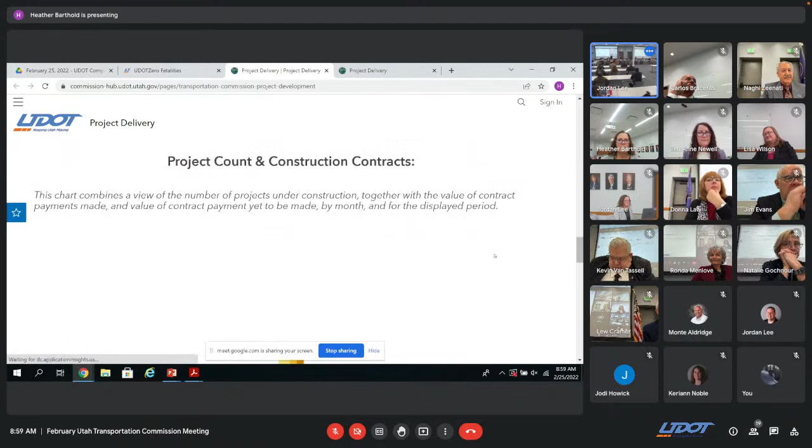Moving down into the construction side of things, we just have the numbers through December at this point, but it's pretty standard, especially if you look back at the previous month or previous year. We're really tracking 149 projects right now in construction, and we'll see these payments going up as the weather warms up and more construction will be occurring.

So here are the contractor payments that tie into the previous graph. Again, you can see the payments going out is just, we're in winter work right now. So you'll see these start to go back up again as more work occurs with the improvement on the weather.

And that is my update for you today. Oh, wait, I have one. Oh no, sorry.

So this is the contract award for the engineer's estimate. And really we're tracking well with our estimates at this point. They're in line with the bids that we're getting.

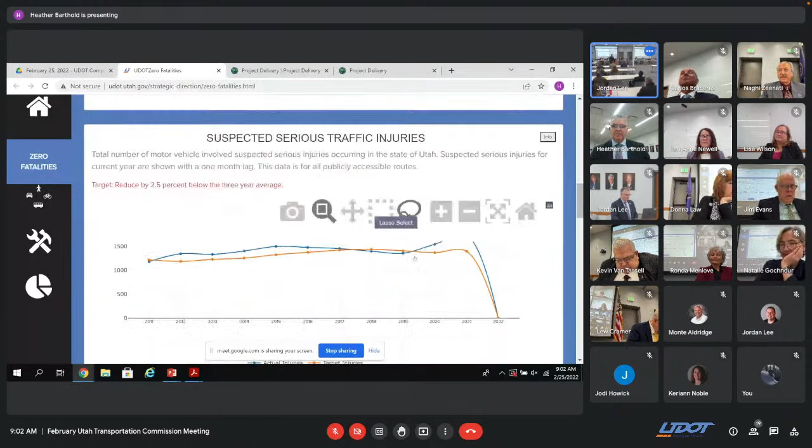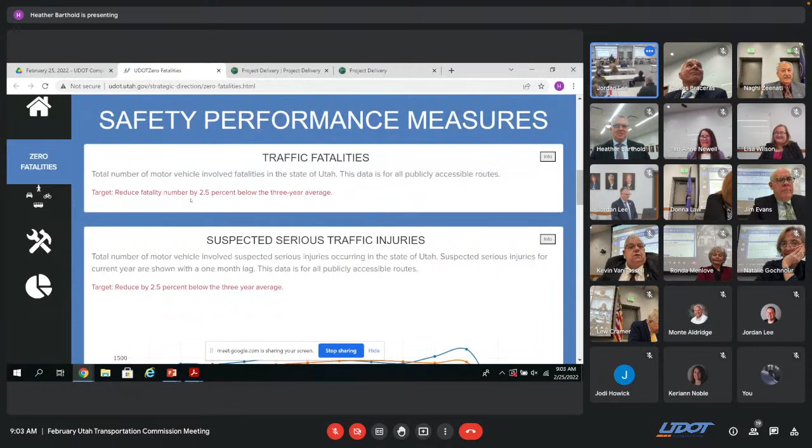As a reminder, we did have... what's this graph here too? For 2021, we had... This is gonna, the graph's not even here anymore. There we go. We don't still have it. There it is.

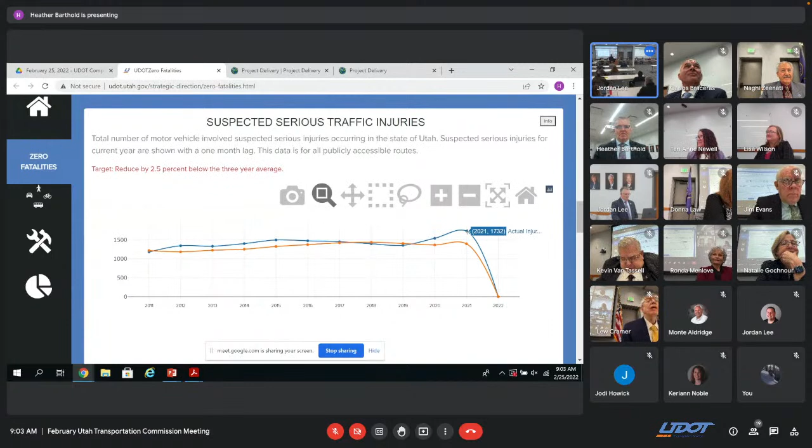329 fatalities in 2021, which is an increase of about 20. Actually, it was about 19% higher than the year before, when we had 276.

Currently, this year, we're at 38 fatalities for the year. 8 of those are in our vulnerable user category, which at this point, those are all pedestrian related fatalities, which is right now about 27% of our fatalities for the year. If you look at 2021, in our vulnerable user category, we had 90 fatalities, which was roughly 27%. So we're tracking right around that 25% of our fatalities each year are in our vulnerable user groups. When you say vulnerable users, that's pedestrians, bicyclists, and motorcyclists.

What a struggle this morning.

So that's kind of an update on where we are in terms of fatalities as it relates to this year or last year. But I wanted to take a little bit of time today to show some graphs on breakdowns of our fatalities statistics. Where is it?

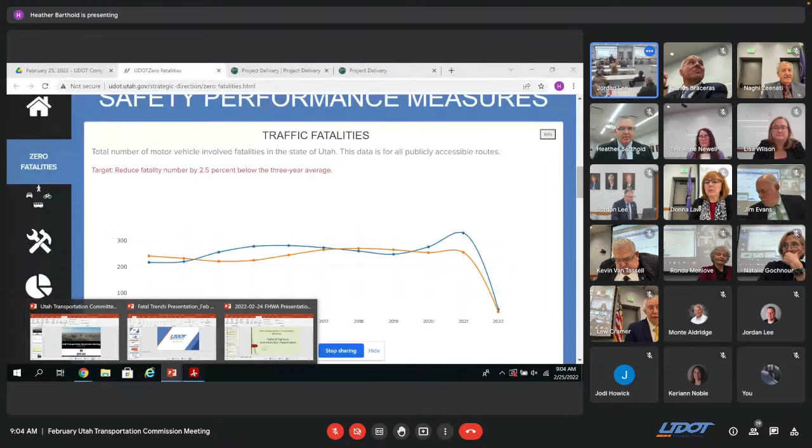Trying to run it. Where is it? There? No, that's about it. Oh, there it is.

Okay, this first graph here is showing our fatality rate, crash rate, and our VMT back to 1940. And you'll see over the last 80 years, we've seen a steady decrease in both our crash rate and our fatality rate.

And the other thing is this dark mass is our VMT. Let me move this thing out of the way so you can actually see. Just thought it was an interesting graph to see how our VMT has grown over the years and how our fatality and crash rates have dropped. Interesting graph. Just wanted to share that one today.

How have the new alcohol restrictions played into this? There's been some media about that, Utah's lower rate.

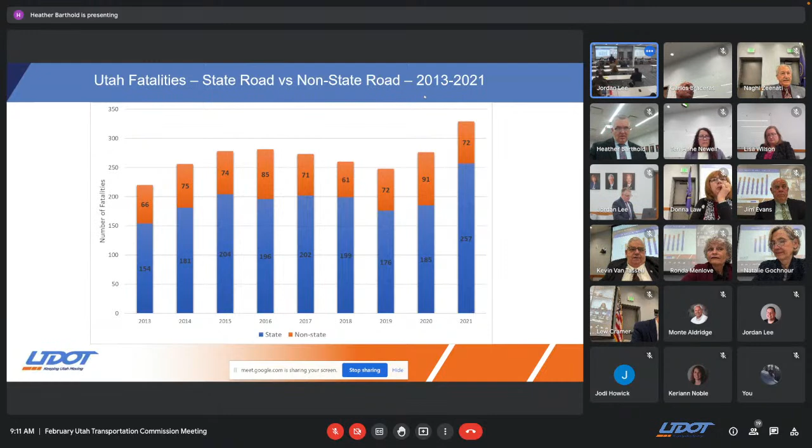Right, I have a question. Yes. Has anyone looked at the correlation with DUI and speed and how they're related? Are the DUI fatalities linked? Looked at those together? That's a great question, I don't have the answer to that one.

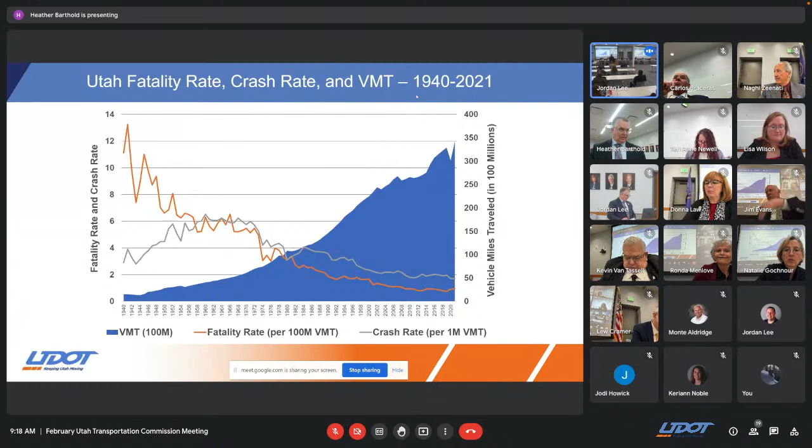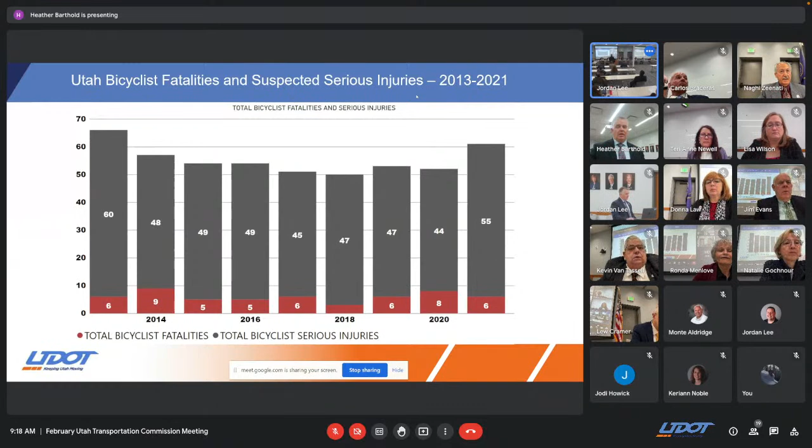Thank you. I just want to show the bicycles, pretty stable, pretty level on that number for bicyclists. And then motorcycles is the other part of our goal.

Any other questions? What constitutes a serious injury? So a serious injury is one causing permanent disabilities, hospitalizations, any of those - basically anybody involved in a very serious accident.

I'm just curious - what's interesting too is you see the uptick in the number of serious injuries, but the fatalities are staying pretty static. Yeah, that's an interesting trend we're trying to look at too.

More people wearing helmets? I'm not sure the answer to that yet.

Since the legislature approved lane filtering, has there been any effect on fatalities or serious accidents - improved, stayed the same? I think it's a little early for us to know the answer to that one. There hasn't been any data showing it's gotten worse. In fact, there was a sunset on that bill, and they extended it this year.

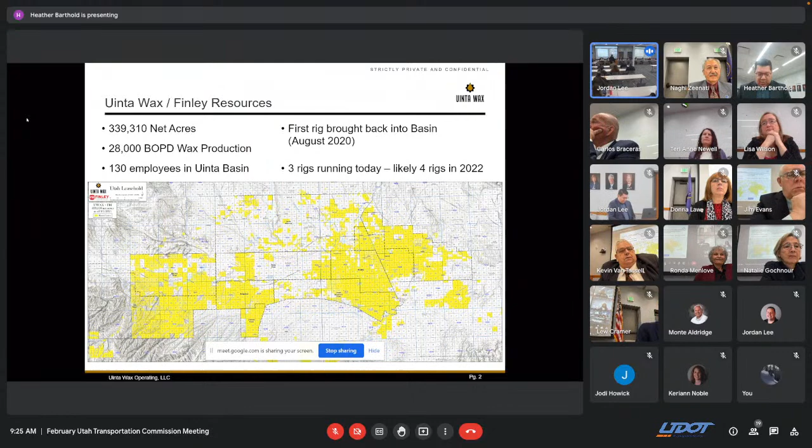We operate over 300,000 net acres in the Uinta Basin and produce about 28,000 barrels of Uinta black and yellow wax. We have 130 employees, 3 rigs running in the basin, and invest about $250 million in annual budget out in the Uinta Basin. We also have our own frac sand facility out there, producing our own frac sand. That's helped our well economics tremendously.

We have the Wildcat rail terminal in Helper, Utah, and we use Highway 191 to take barrels down to that facility. So I'm really here to advocate for Highway 191 today. We're currently producing about 20,000 barrels above the 80,000 limit in Salt Lake City, and we're taking that to the Gulf Coast. Our CEO, Jim Finley, has been very instrumental in creating an export market for this resource, and we expect to continue to grow this resource.

Our Wildcat terminal is being upgraded to produce 30,000 barrels, and our phase 2 will take us up to 60,000 barrels. We have 900 rail cars in our fleet.

Our partners, our stakeholders are very important to us - obviously our oilfield service companies, local businesses, and our local government, both local commissioners, tribal government, and our state and federal partners and agencies as well. We're very committed to environmental, social governance. Emissions are something very important to us, so we're working hard to create a safe operating environment that considers our environmental goals, and our compensation is tied to our ESG goals.

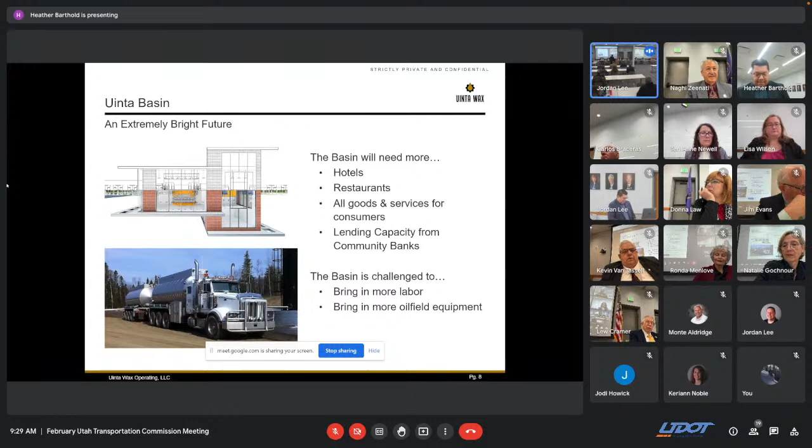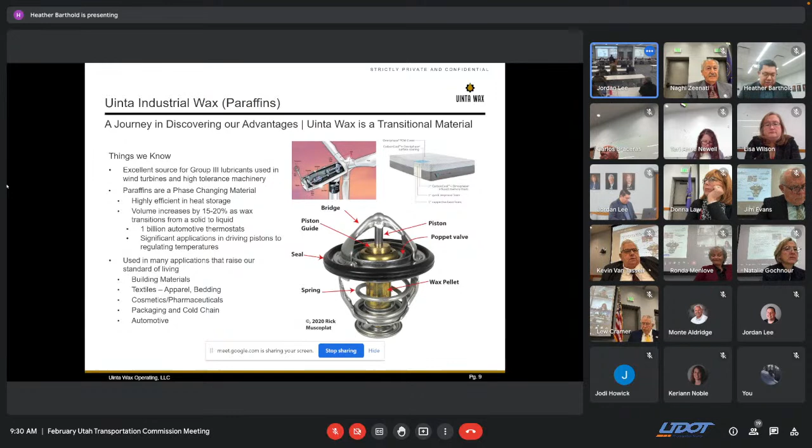I want to talk a little bit about our product, Uinta Black and Yellow Wax. It's a unique product, it has unique characteristics, and it's a transition material. It produces a lot of the high-end lubes that go to support these windmill turbines, and there's a big market for this resource. Wax engines, there are over 1 billion automotive thermostats that derive from this resource. And so building materials, textiles, cosmetics, packaging are all derived from this resource.

And so in conclusion, Uinta wax is a transitional material. It's less combustible than North Dakota, Texas crudes. It's lower in sulfur and metals, acidity, which means less energy in the refining process. And it's a critical transition material for high-end lubes, heat pumps, wax motors, heaters, coolants. And we certainly, all of us have Ukraine in mind, and we certainly are praying for that situation over there. But it's a sound energy policy that will help us create national and worldwide security, and Utah certainly can play an important part in that.

And so today, again, I wanted to educate you and make you aware of what's happening in the eastern part of the state, and ask for your support with Highway 191. On behalf of our CEO and our entire executive team, I'd like to thank you for the time today.

Thank you. Cameron, yesterday when I went over Indian Canyon, I passed 4 of the trucks going up and 2 were coming back. You have 900 tankers currently in your, these are rail cars. How many barrels will each car hold? What do you put in each?

I didn't bring my notes on that, but I can find out for you. Because a truck going over will haul what, 280? 275 barrels on average. Some of the supers do about 300. And that'll take about 3 of those trucks to fill a tanker. Yep, about 3, it's about 900.

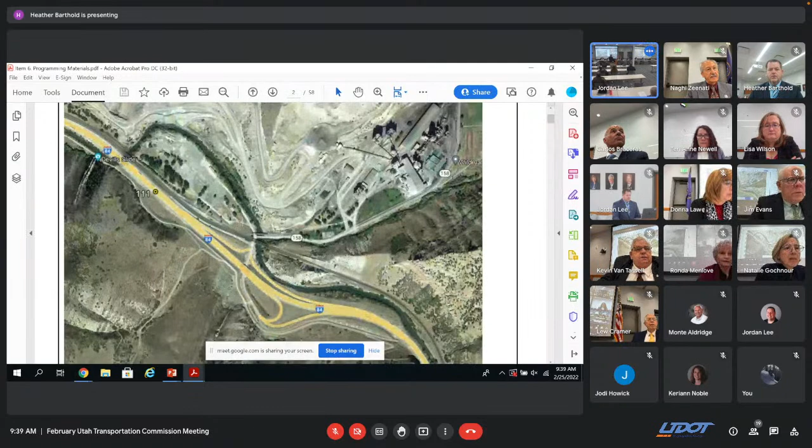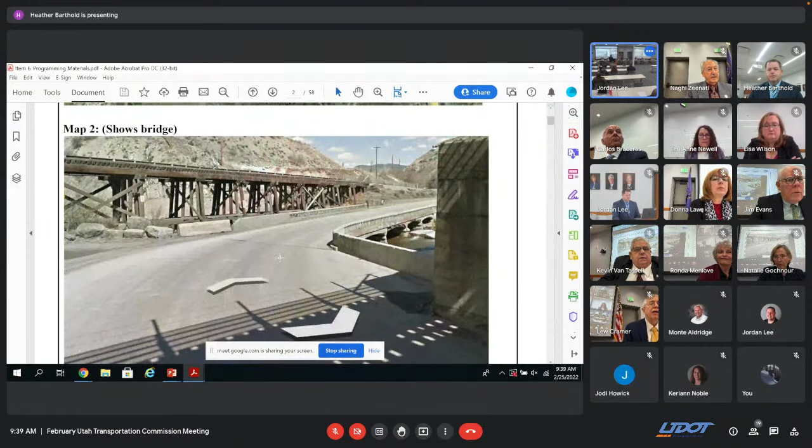Located here on our map—Croydon, right here in the center of the screen off of I-84, showing the bridge replacement. Yeah, it's going through a bridge. Nice spin-off—not the railroad.

Our request today is a motion to approve adding funds to the Devil's Slide Bridge project as detailed. I so move—we've got to keep it sliding. Don't change your name from the devil to something else. I'll second the motion. We have a motion and second. Any other questions or comments? Seeing none, all in favor say aye. Aye. Any opposed? Item 6A-1 is approved.

Thank you, 6A-2 is a funding transfer between two projects: the I-15 Farmington to Salt Lake City EIS, and the I-15 reconstruction Farmington to Salt Lake City. It transfers $6 million from the reconstruction project to the EIS project. The I-15 Farmington to Salt Lake City EIS is currently underway to accommodate early right-of-way acquisition, utility investigation, and environmental activities. The project team proposes to move $6 million from the construction pin of this same project into the environmental pin. Located here on our map.

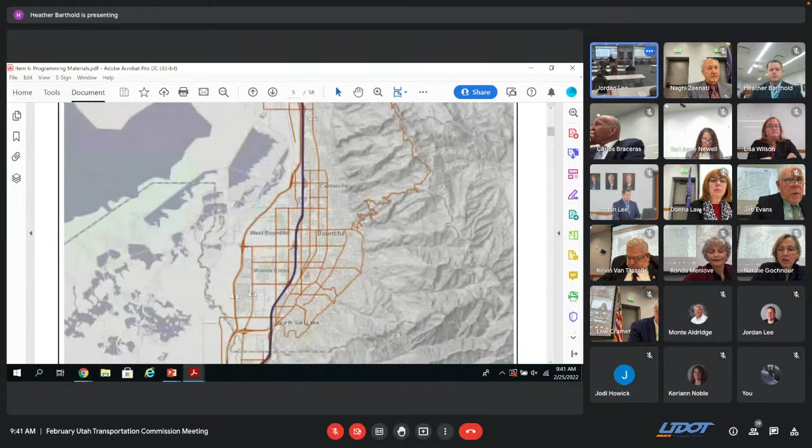The request today is a motion to approve transferring scope and funding between the I-15 Farmington to Salt Lake City EIS project and the I-15 reconstruction Farmington to Salt Lake City project, as detailed. Go ahead.

By transferring the funds from construction to the EIS planning, does that hamper the construction project at all, or are you going to have to come back and ask for more money for that?

I might phone a friend on this one. I love phoning friends - Tiffany's here. Our environmental project, we funded that before this project. We didn't know this project was going to be funded as quickly as it was, so now we have access to that construction fund. Some of those activities we are moving in coordination with the environmental project, like the early right-of-way acquisition - activities we probably would not have done had the reconstruction project not already been funded. Tiffany, what did I miss?

Hi, Tiffany. Hi. You have to come to the podium. We haven't really met you yet. Yeah, introduce yourself, please. My name is Tiffany Bogak, and I am the project manager on this environmental study.

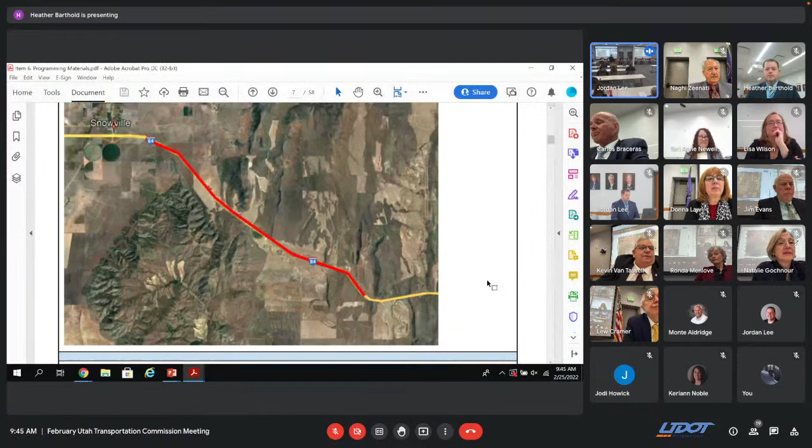Located here on our map. Our request today is a motion to approve adding funds to the I-84 East Snowville to Hansel Valley project, as detailed. I just wanted to comment in support of this - this is an important trucking route through northern Box Elder County into Idaho, and so I just wanted to stress the importance of this.

Mr. Chair, I just wanted to ask, is this a good example of maintenance versus not maintenance? It's such a big jump in such a short amount of time, and I'm just asking the question if we missed some of the maintenance we should have done, between adding the crack seal - I think the timing became part of the issue.

Rob Wight, Region One Director - I was so excited to answer that. So usually our philosophy is good roads cost less. We're going to try and go do treatments before it comes into this condition. This condition is one that we don't like to be in, and so it's smarter to go in ahead of time and keep our roads in good condition so you don't have these types of emergency fixes. The plan was originally just to go crack seal and hold that together until we could get in and reconstruct, which is going to be a few years down the road.

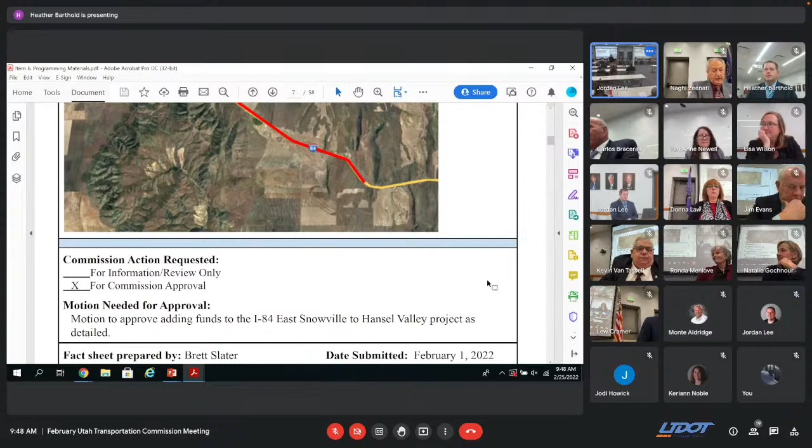6A-4, SR 39, Ogden Canyon Barrier Upgrade. It's a new project, $750,000 funded out of the Transportation Solutions Program. The barrier in some sections of Ogden Canyon is installed near the top of the riverbank. When hit by vehicles, those sections often end up in the Ogden River. Crash data shows there have been 108 roadway departure crashes in this narrow winding canyon over the past 5 years. UDOT recently replaced a bridge in the canyon and also replaced some barrier with cast-in-place barrier. This project will continue to replace existing barrier in specific locations with this new cast-in-place barrier.

That's a heck of a lot of crashes in one spot. Throughout the entire canyon, not just this location. You can see how close the barrier is along the river.

Our request today is a motion to approve adding the Ogden Canyon Barrier Upgrade Project to the current program. Are we going to add any buffer between the barriers and the roadway, or will it be the same location?

At least you're on the front row, Rob. I knew I was going to get questions, so I sat on the front row. So what was your question again?

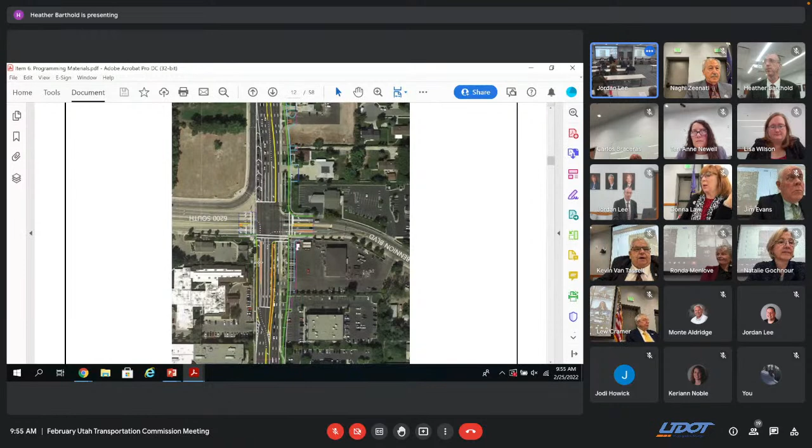Okay, so that is just unused space. Unused space, correct. Okay, thank you. Interpreter, I appreciate it, kept me awake. Thank you, Brad. Usually we put people to sleep, so.

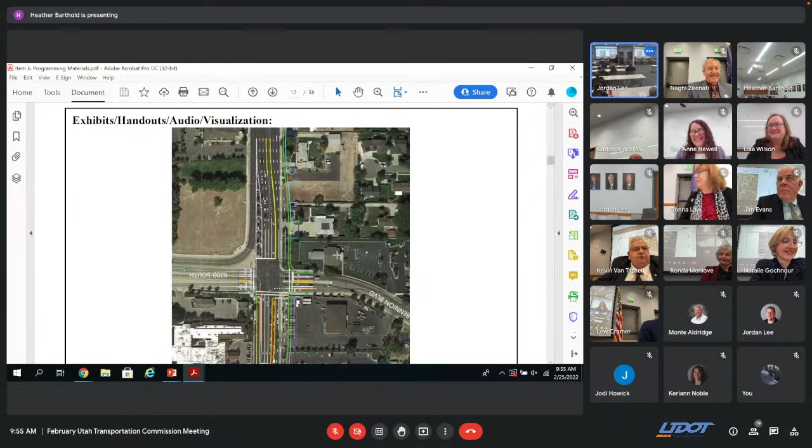Our request today is a motion to add funds to the SR 68, 6200 South to I-215 project, as detailed.

Since I now understand the chevrons, I'd like to make a motion to approve this project. Thank you. I'm happy to second it. There's a second on the motion. Any other questions from Ida or Brad? Seeing none, all in favor say aye. Aye. Any opposed? Item 6A-5 is approved. Thank you.

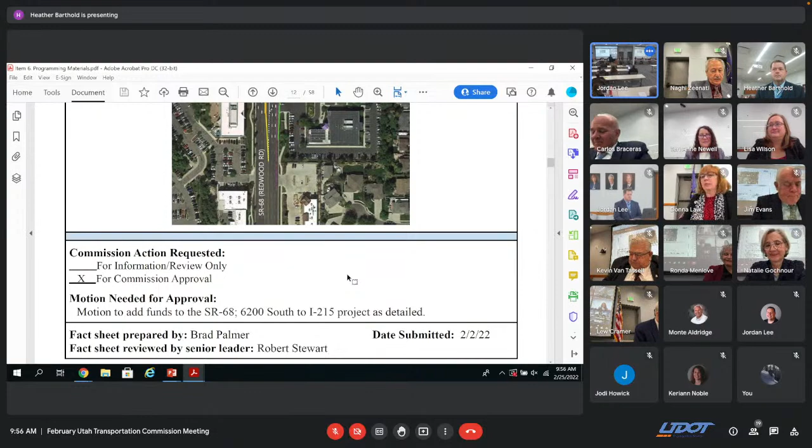Our next item, 6A-6, US 89, 215 to 3000 South, a funding addition through the Transportation Solutions Program. Current project value 7.1 with a request of 1.1. The scope of the US 89 I-215 to 3000 South project is to perform a pavement preservation of a 1-inch rotomill with a 1-inch open graded course surface, replace substandard ADA pedestrian ramps, and replace the raised median at the intersection of Vine Street to extend the left turn pocket.

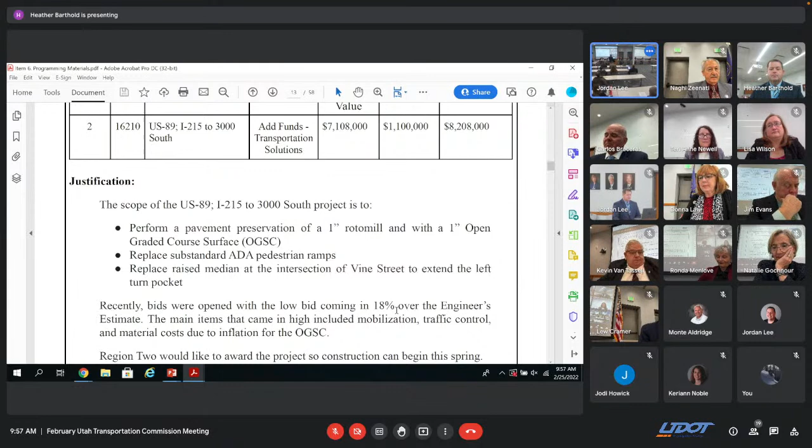Recently, bids were opened with the low bid coming in 18% over the engineer's estimate. The main items that came in high included mobilization, traffic control, and material costs due to inflation on the open graded course surface. Region 2 would like to award the project so construction can begin this spring. Located here on our map.

Our request today is a motion to add funds to the US 89 I-215 to 3000 South project as detailed. What is the amount we're adding? 1.1 million. I would move that we approve. We have a motion from Commissioner Law, so that will be your second, if you don't mind. Is that okay, Commissioner Van Tassel? Pardon? Commissioner Law had the first motion. Is that okay, you second it? Yes. Okay, any other questions, comments, concerns?

I drive that twice a day. That's certainly supported, certainly supported. I'll get you here safely. All in favor say aye. Aye. Any opposed? Item 6A-6 is approved.

6A-7, the Provo River Parkway. This is the comment from Mayor Lucy earlier.

It's a request to add funds. The current project value is 15 million. You see the split between the UDOT and the Mountain Land Association of Governments funding. The requested add with the proposed value is 34.4 million.

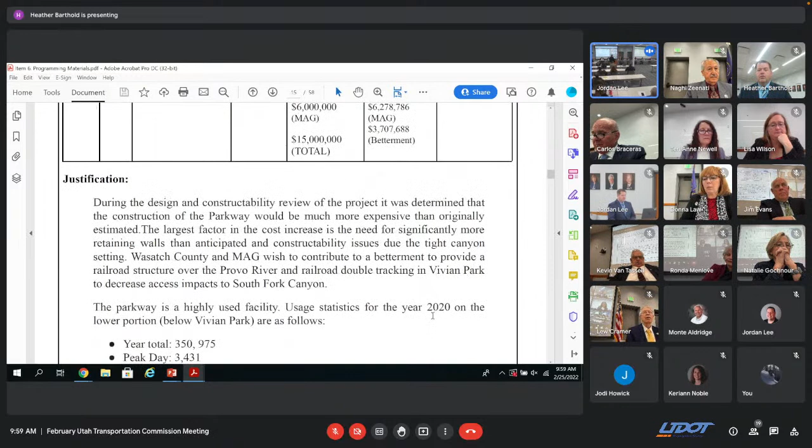Wasatch County and MAG wish to contribute to the betterment to provide a railroad structure over the Provo River and the railroad double tracking in Vivian Park, to decrease access impacts to South Fork Canyon. The Parkway is a highly used facility.

Usage statistics for the year 2020 on the lower portion are as follows: for the year total, 350,000, with a peak of 3.4 and a daily average just under 1,000.

This item was approved by the Mountain Land Association of Governments MPO TAC on January 24th, 2022, and the Regional Planning Committee on February 3rd, 2022, and the Wasatch County Commission on February 2nd, 2022. Here on our map, along in the Provo Canyon.

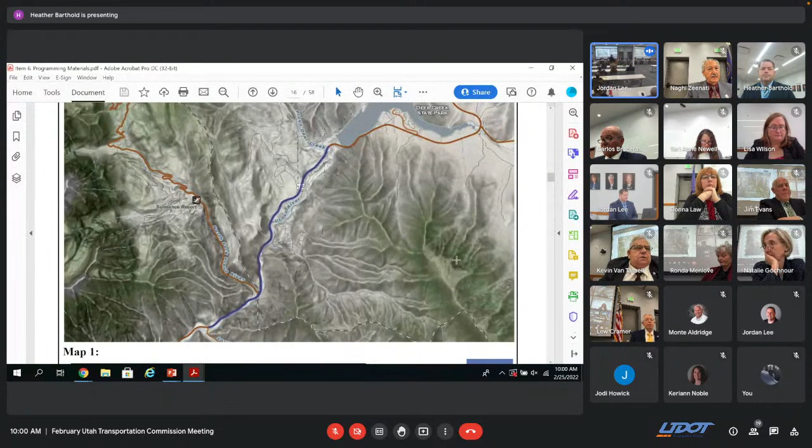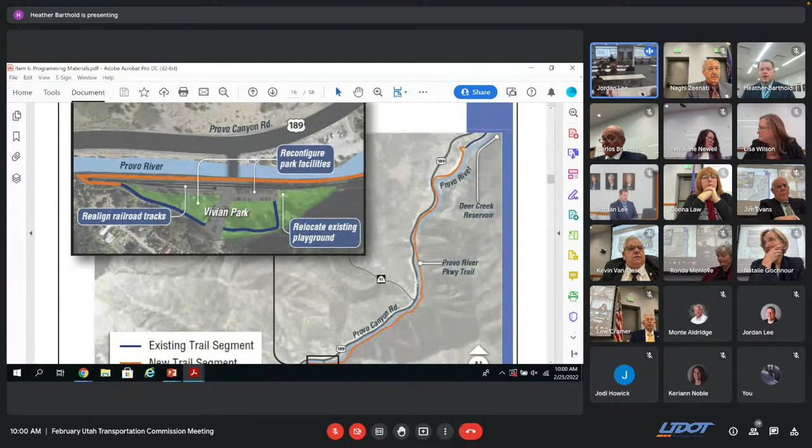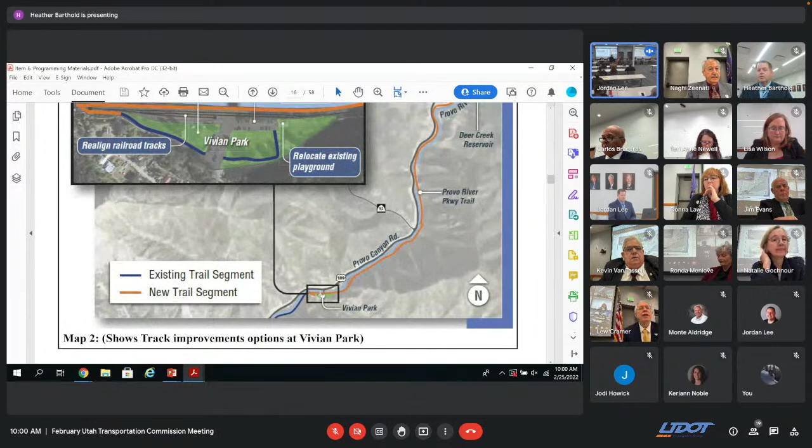Also included is a couple of design images showing what the Vivian Park area would look like, the proposed area. Also where the existing trail segment ends right here outside Vivian Park and the new trail segment would begin, showing the narrow section where the trail would be placed.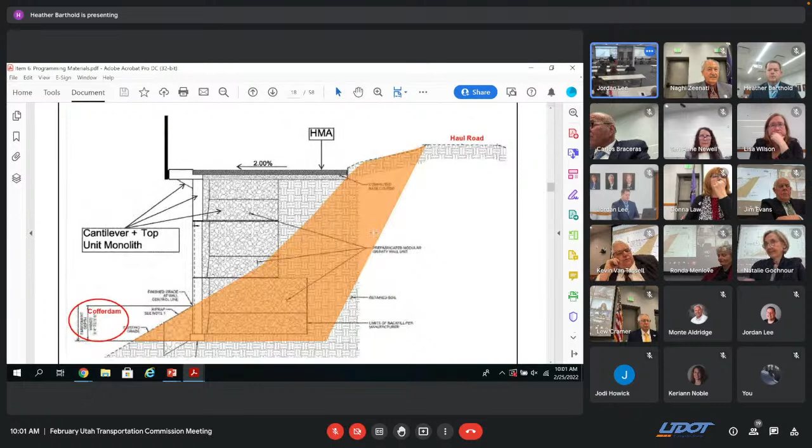This is the image of how it would be constructed, the additional work that would need to be done. Included in the packet also detailed the project estimate with some of the betterment work that is being requested.

Our request today is a motion to approve adding funding to the Provo River Parkway project as detailed.

Mr. Chair, before I make a motion, I've been up there a lot and looked at this. Rob and his staff have taken me up there multiple times to get out and walk this. I know this has been going on for 20, 30 years, whatever, a long time. And it's just not a safe way right now to get those cyclists and walkers, especially cyclists. They come down from Wasatch, those great trails, they go up, and they have to go out on Provo Canyon basically, which isn't safe to have them ride. So I see this not only fixing it as a safety issue finally - I know it's a lot of money, but it would benefit a lot of people that use these great trail systems. This is one big missing link that we have.

And where it shows the retaining walls, there's just kind of no way you can get around that, but do that type of work. So anyway, I'd move for approval of this project - I've had a look at it a lot with Rob and this group up here.

Second that. And if I understand right, Carlos was the region director? That was a long time ago. And did they understand also that we own the railroad, that UDOT owns the rail portion of that location? We own the rail bed.

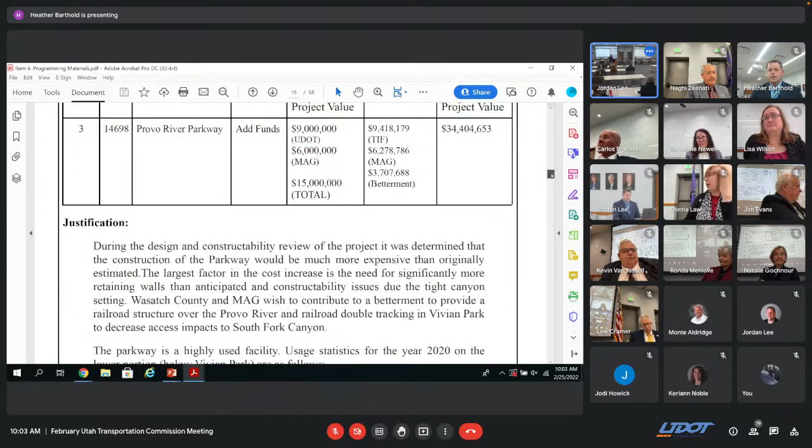So we've already approved a good bunch of money, and I know that we have partners in this project. So would I understand correctly that the additional funds are because the project previously approved really didn't have all the stuff that it needed to have? I guess I'm just trying - because it's a lot more money. And I realize we've been doing this for a long time, and it's a good thing for sitting on the front row.

We can see, and Rob will finish my statement, the different funding that's being requested: the Transportation Investment Fund, Mountain Land Association of Governments, and then the betterment portion.

Rob talk. Thank you, Rob Clayton, Region 3 Director. If I understand your question, Commissioner, you're wondering why the dramatic increase. That's my job here. Yeah, well, that's something that we struggled with before we decided to ask for this money. And it's a fair question and a fair criticism.

Included in this is the pressure that all projects are feeling with inflation, but this is much more than that. We don't build this kind of project very often, and our consultants don't either. As we were originally estimating it, we just didn't do a very good job. As we got further along, we had a constructability review with contractors looking at it from our side, and they identified significant issues, such as needing more walls than originally estimated. They have to put in coffer dams to hold the water back so the slopes and walls can be constructed properly, and all of that has to happen in a constrained space. They have to touch all the materials twice, staging them in one area and then bringing them down along that skinny access road. It just makes it more difficult to construct, and the original estimate wasn't very good.

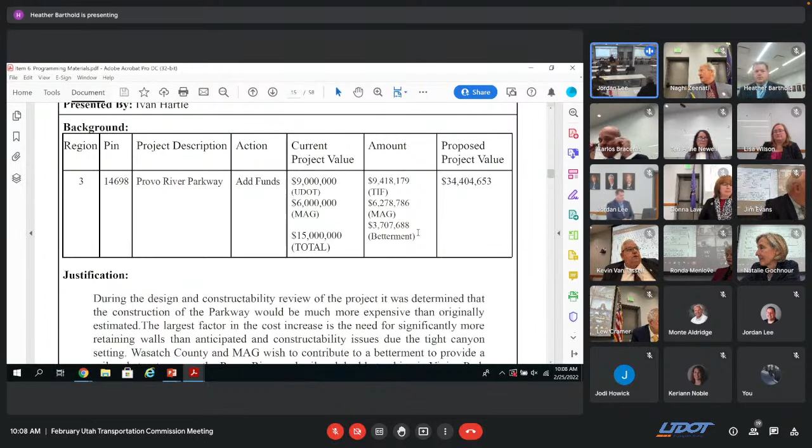We have a motion and a second. Any other questions or concerns? Seeing none, all in favor say aye. Aye. 6A-7 is approved, thank you.

Congratulations, Mayor. I hope this is a good gift after the dentist work for you.

Item 6A-8 is a funding and scope transfer similar to the one before. This is on US 89 Birdseye to US 6 Thistle. The funding scope change is $800,000, changing from Region 3's 2022 region-wide drainage improvement project. The project scope for US 89 Birdseye to Thistle is to preserve the life of the pavement by placing a chip seal on the roadway. A culvert located within the project limits was damaged on July 26, 2019 by a mudslide that ran over US 89 near Birdseye. Region 3 proposes to add $800,000 to the currently programmed Transportation Solutions Fund from PIN 19143, the drainage improvement project, to replace the culvert and add protective devices to maintain the channel's integrity. Combining the scope will allow the pavement preservation project to seal any joints in the asphalt caused by the reconstruction of the culvert.

This flood was partially because of a fire in the area too, wasn't it? I believe so. I went through that area just after that fire and it was a mess.

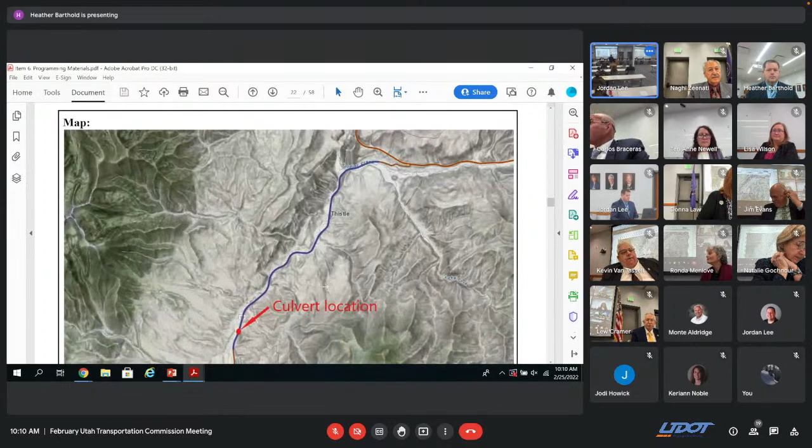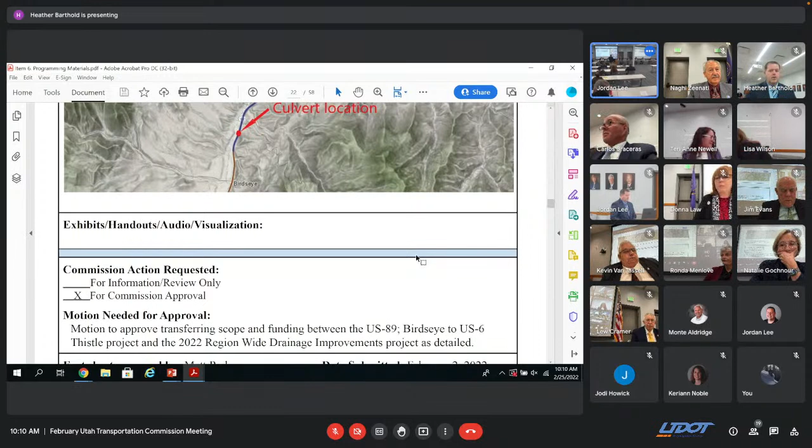And this will fix it for the future, because there could always be another flash flood or something in that area. This one is a preventative for the future as well, correct? So located on our map is the culvert location on the south end of the current project segment.

Matt, would you like to talk about that? I'm Matt Parker, the Region 3 Program Manager. The answer to that question is yes, because we're planning to armor some of that channel that comes into the culvert, to prevent that from happening again. Thank you.

If you're ready for a motion, Mr. Chair. I would make a motion that we approve. Second that. So motion and second.

I'm grateful we have a designated driver on the commission who's been on every single one of these roads. I had to use my map a lot, well, not today. You got the miles on the pickup to prove it, so.

All in favor of this project, say aye. Aye. Any opposed? Item 6A-8 is approved.

In the state of Utah, we spend a lot of money fighting fire, and we've done really well. But the aftermath is usually more expensive than the fire, for individual property owners as well as for us.

Thank you for recognizing that. It changes the entire drainage pattern. We see increased landslides, so thank you for recognizing that. A few years ago, we had the Brian Head fires, and the year after, flood came all the way to I-15, closing I-15 sometimes within months.

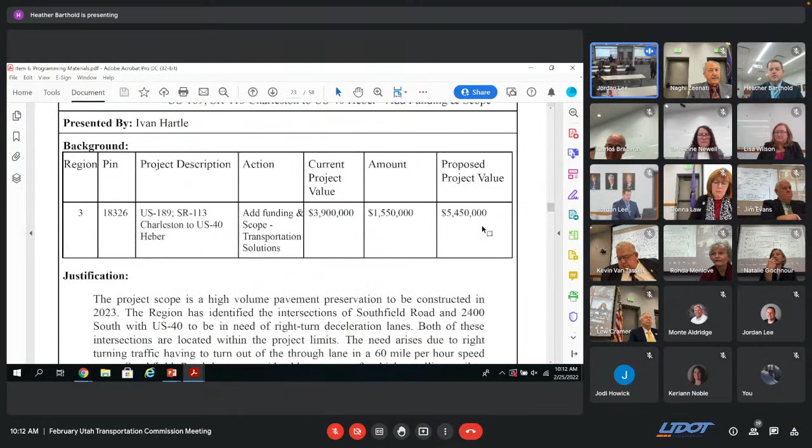6A-9 is the US 189, SR 113, Charleston to US 40 Heber project. It's a funding and scope addition from the Transportation Solutions Program. The project scope is high-volume pavement preservation to be constructed in 2023. The region has identified the intersections of Southfield Road and 2400 South with US 40 to be in need of right turn deceleration lanes. Both of these intersections are located within the project limits. The need arises due to turning traffic having to turn out of the through lane in the 60-mile-an-hour zone.

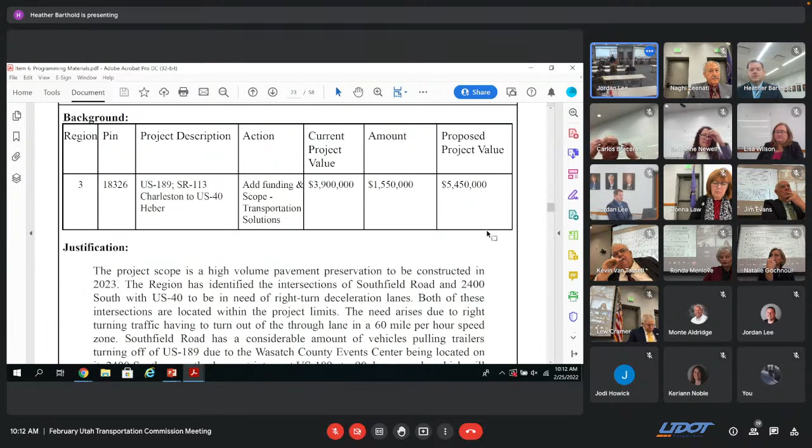Southfield Road has a considerable amount of vehicles pulling trailers turning off of US 189 due to the Wasatch County Events Center located on it. 2400 South currently does not intersect US 189 at a 90-degree angle, which will be corrected with this additional scope. These funds will provide deceleration lanes off of US 189 onto Southfield Road and 2400 South, improving safety on this corridor.

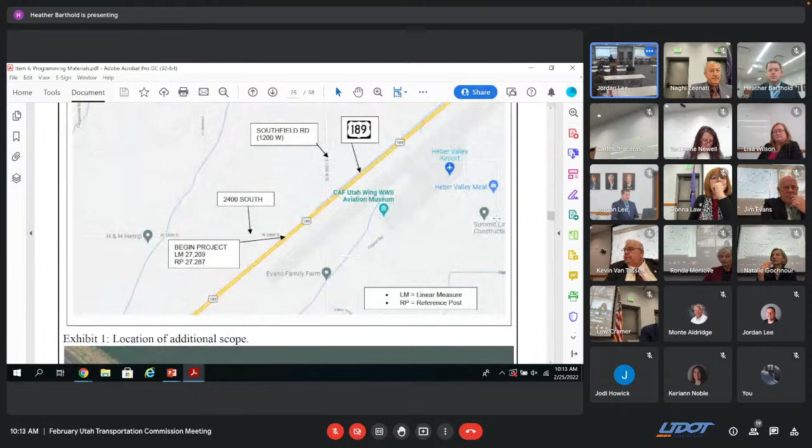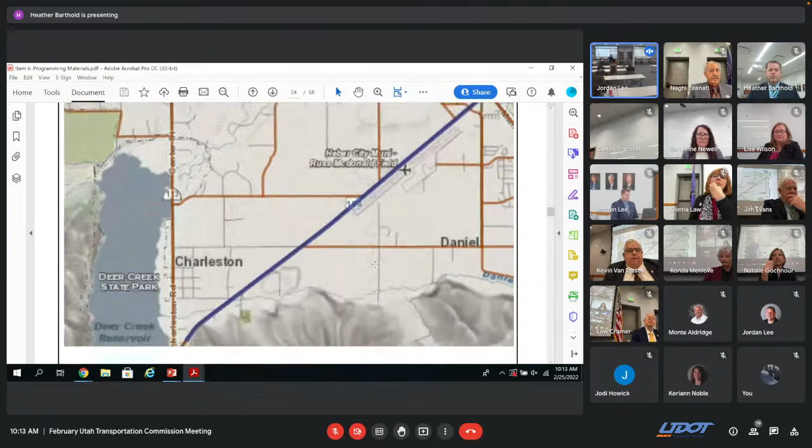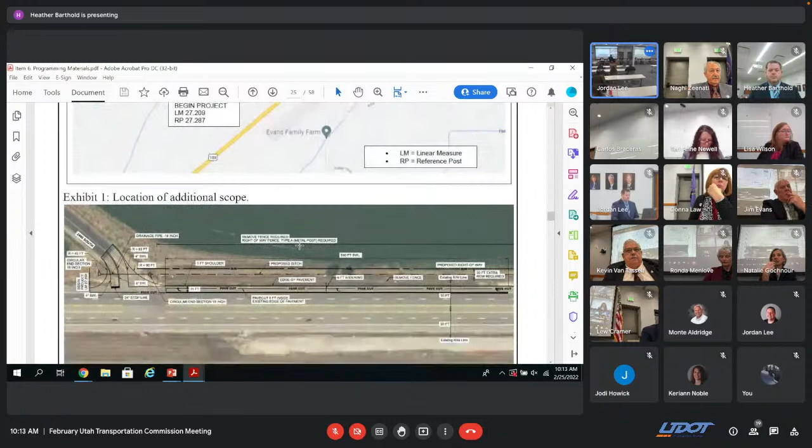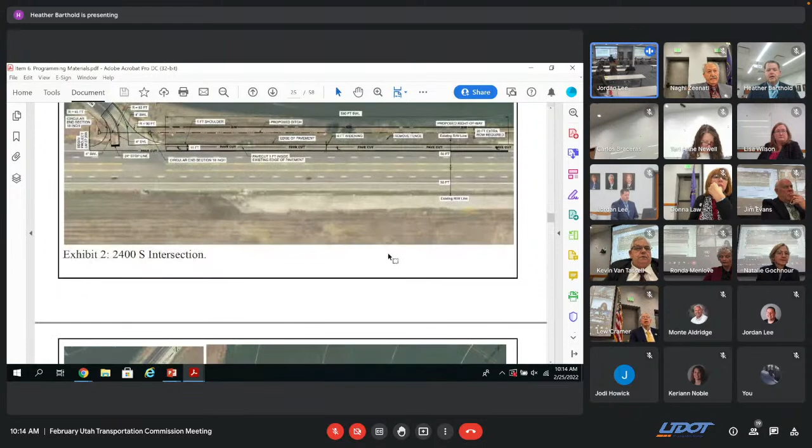So the project limit is shown here on the map. Zooming in to show the project location changes. You can see from the map, let me just point - right here along the airport is where we'll see the location. So improvements are right here, at Southfield Road and 2400 South - the increase for the pavement deceleration lanes, right-hand turn lane, both at 2400 South and also the Southfield Road intersection.

I have driven on this road multiple times and it's needed. Those corrections are needed very much. They remember they had those fiery, flaming crashes there - it is because of that, just all along there. So anything we can do on that whole stretch to improve it.

If you're done, I'd move for approval. Second. This needs to be done. Motion and a second. Any other questions? All in favor, say aye. Aye. Any opposed? Item 6A-9 is approved.

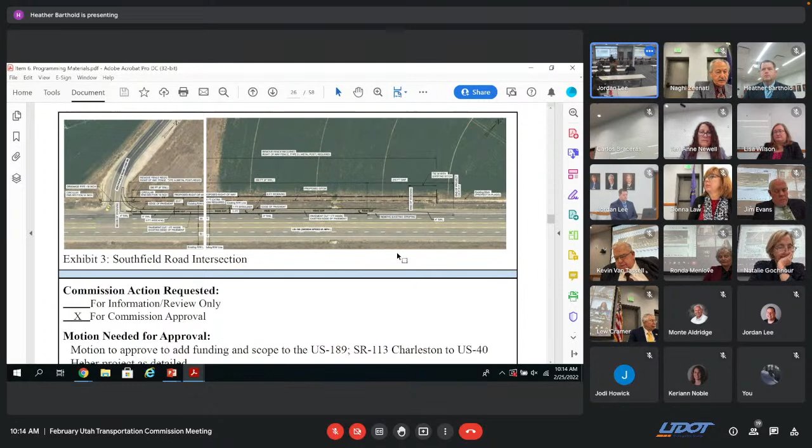Thank you. 6A-10, the UTA Provo Rail Pedestrian Bridge. It's a funding addition. The current project value is a little under $5 million.

You can see the partnership of UDOT, UTA, and Mountain Land Association of Governments. The project scope is to construct a pedestrian bridge over 600 South in Provo and the Union Pacific Railroad and the UTA FrontRunner tracks in the vicinity of 100 West. This would allow pedestrians to cross the tracks while trains are present. Since the original estimate, a roof over the structure and elevators at each end have been added to the scope. As the project is ready to be constructed, the estimate has been updated, showing a $2.6 million increase from the original estimate. The project partners have identified funding from multiple sources prior to the request from UDOT.

This item was approved by the Mountain Land Association of Governments MPO TAC on January 24th, and the Regional Planning Committee on February 3rd of 2022.

That's the location we visited as a commission. It is right by the overpass, yeah, it's right next to it there. I believe this just makes it a better project, and finishes what should be done. There's a lot of low-income housing, they need that. I move for approval.

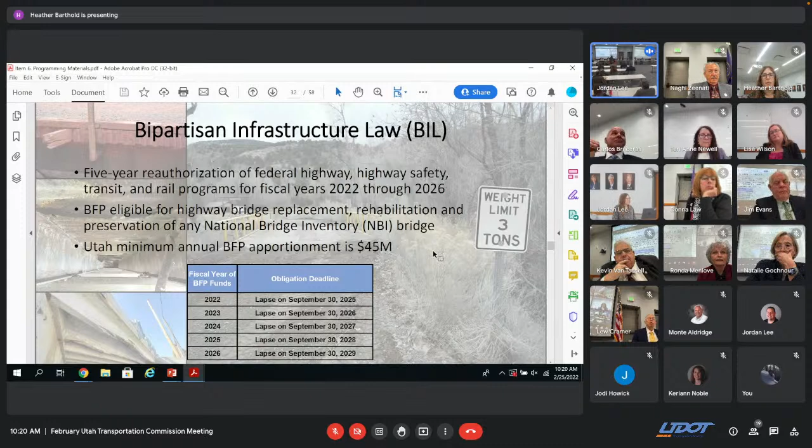So just a reminder, this is a 5-year reauthorization from Federal Highway for highway safety, transit, and rail for 22 through 26. The bridge formula program is eligible for highway bridge replacement, rehabilitation, and preservation of any NBI bridge - anything on the National Bridge Inventory. Utah's minimum apportionment for the next 5 years is $45 million a year, with 3 years after apportionment until it lapses.

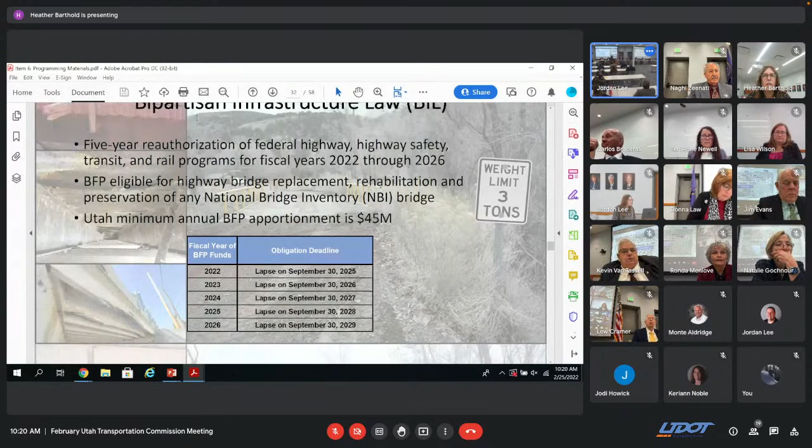Some of the limitations and encouragements from the law are that states are encouraged to focus on bridges first classified in poor condition. A minimum of 15% of the funds are to be used for locally owned off-system bridges - bridges not on the national highway system. When used on locally owned off-system bridges, there is no federal match required. Normally there's almost a 7% match required from the locals, but this gives them 100%.

Heather, why would some of our bridges not be on that directory - are they just smaller, or later built? I'm just curious. Why would some of our bridges be off-system bridges? It has to do with the roadway classification - there are different classifications of roadway, and those do not apply for an on-system designation. So the smaller ones tend to be off-system, for the most part these are all small bridges. But that's not the requirement, because we do have some small bridges on-system. Got it, just curious. Thanks. Sure.

Part of this is you can accommodate pedestrians and bicyclists on the bridge replacements when it meets certain conditions. So even if there isn't one, if it's tying into another system, there are opportunities to include active transportation with this. It's also eligible for a nominal amount of approach work, basically to tie the new bridge into the existing roadway.

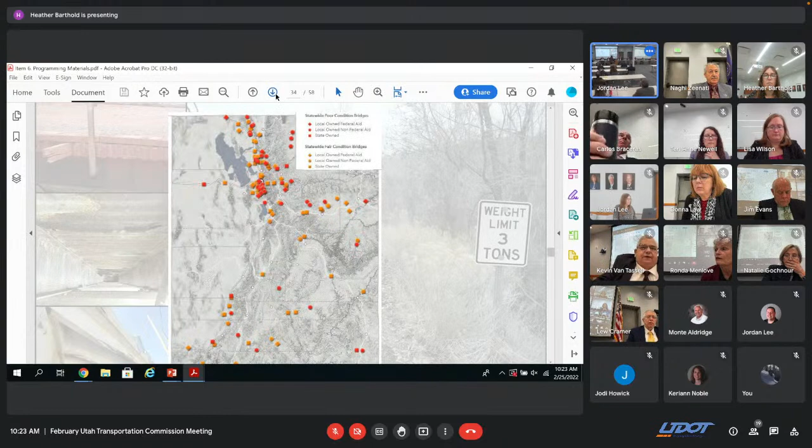But then when you look at it by deck area, that's where the context that these are smaller bridges comes into play. 87% are state owned by size, and a smaller portion are locally owned.

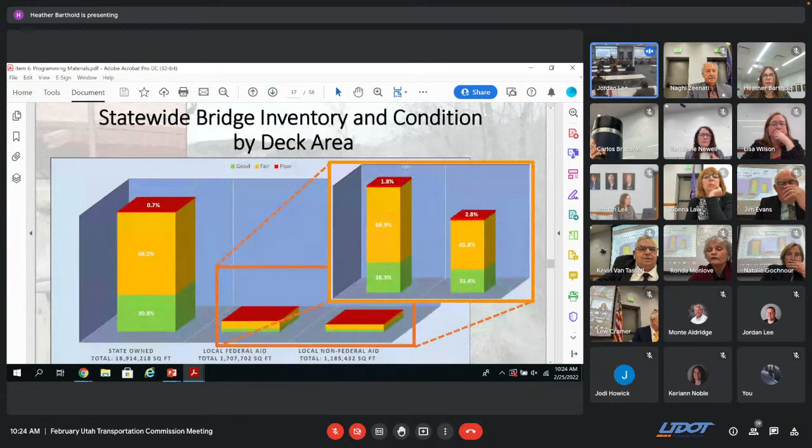Another way to look at it is by deck area, again by size. By the size of them, that's about 2.8% of the decks on the off system, and 1.8% are in poor condition.

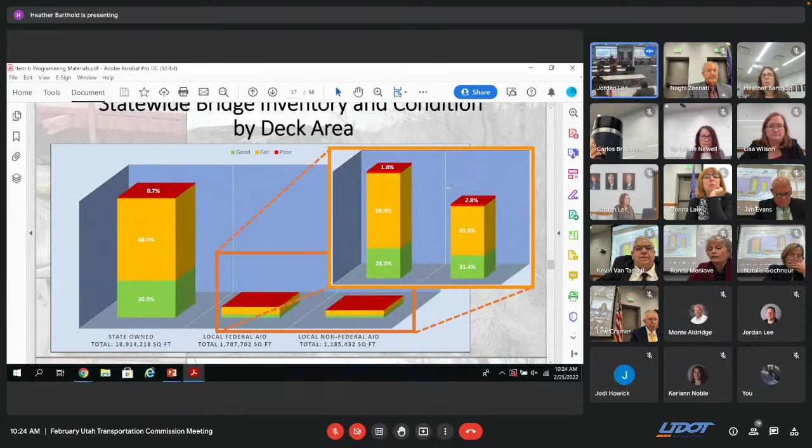Looking at it specifically based on poor condition, by count, you can see that almost 50% of the bridges on the off system are in poor condition. By deck area, that's about 18%.

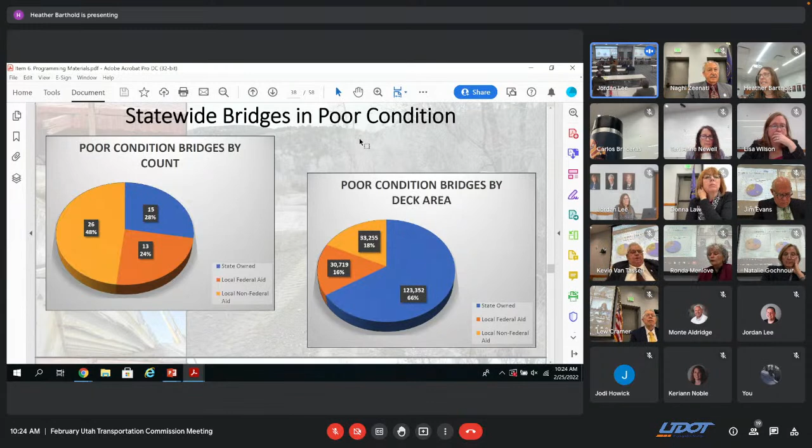So just want to go over some of our goals. We would like to try to rehabilitate or replace all the bridges currently rated as poor condition. We want to address as many low load restricted bridges as possible. We have a lot of bridges limited to 3 tons, the lowest posting before we have to close a structure. We have some at 10 tons, and we want to try to hit as many of those as possible. So we're going to need to prioritize.

First, we're going to look at poor condition bridges. Then we're going to look at load restrictions, and then also, currently the only funding source for off-system bridges is through the Joint Highway Committee, and up until now it's only about 1.8 million a year. So we're going to take a look at what applications have already been put in by owners for those, and try to bring those into that program. Actually, the next agenda item covers a couple of those bridges.

Can I ask a question? When you use the term owners, are you referring likely to municipalities? Towns, counties? Okay, thank you.

And so we'll look at previous funding applications from owners, those local owners who have already looked for ways to handle their bridges but just haven't been addressed yet because there hasn't been enough funding. Then we're going to prioritize based on if we can bundle by bridge type and location. We're going to have significant outreach with those owners to make sure we're partnering with them to meet their needs.

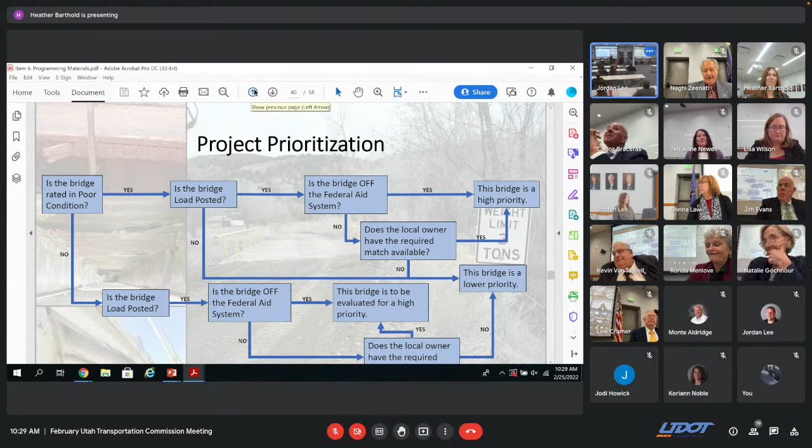Any other questions? Did anybody here have any idea how many bridges we had in the state of Utah? It's amazing, Carmen did. We're a relatively low bridge count state. Really? Amazing, yeah. Thanks for keeping an eye out. Thanks, Jeff. Thank you, Heather.

This was for information only, so we don't really have any vote on this.

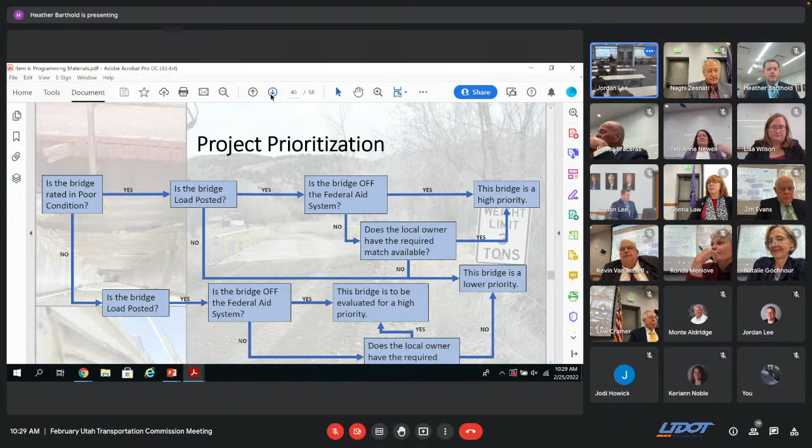With that presentation about the bridge formula program, our next item, 6A11B, is a list of 3 projects that we would like to include immediately into the bridge formula program to be funded and begin using. The first item is bridge formula program management, and the second 2 items are bridge replacements previously approved by the commission at the recommendation of the Joint Highway Committee. As part of the bridge formula program, the off-system bridge funding we've received up to this point has been around $2.5 million that the Joint Highway Committee has recommended back to the commission to fund, so you can see the difference in how much money this will help those off-system structures.

The department proposes to fund a project that would be used to hire a consulting firm to perform program management services. This would include assisting in administering, prioritizing, coordinating, preparing, designing, reviewing, managing, and delivering projects associated with the Bridge Formula Program. That is a $5 million bridge management program.

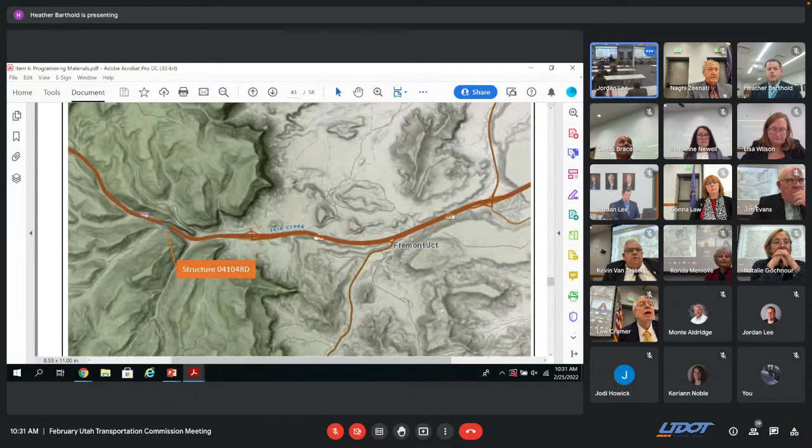Located here on the maps are the 2 structures we've discussed that are currently funded and being proposed to move: the Ivie Creek structure, and pictures of the 2, the Navajo Bridge and Trail Bridge.

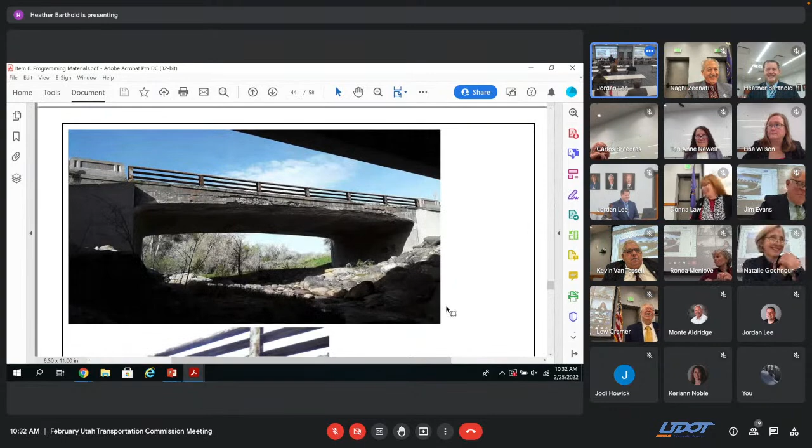Every time we see these photographs, I think we've got a pretty good photographer to make things look so bad. No, we're supportive, yeah. Oh, that does look pretty bad. I'm glad, Commissioner Cramer, the lens doesn't lie. That's right. I just don't want our esteemed senator driving on any of those roads on his designated driver responsibilities. So I move for approval. I think that's a great way to take advantage. We're doing it as quickly as possible and support it.

Okay, please go ahead with the question. Oh yeah, I know I've had a lot of questions today.

$5 million is a lot for a consultant. What kind of period of time are we looking at? Why would we choose to outsource this versus having people help Cheryl through this prioritization process? I see this every day with the work I'm doing up on the Hill. That's a lot of money.

Yes, so this program management is going to extend for probably about an 8-year period. We have 5 years of funding and then 3 years until it's expended. A portion of them will also be delivering projects. We're going to have a bridge list and they'll help figure out how to bundle it, and portions of that will go to them to deliver as well as additional consultants.

But what I want you to recognize is this is basically the size of our current program. Right now, up until 2 years ago, we were at 48 million for our entire program, and 30 million of it went to rehab and replacement. This is 45 million a year for each of the next years.

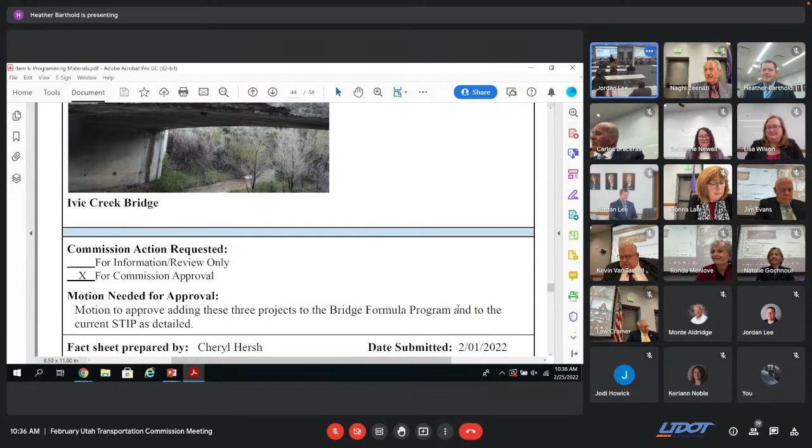Staying with the structures and bridge theme, item 6A12, the bridge replacement at Rockport Reservoir. This is a funding increase. Current project value of $4 million with a requested increase amount of $2 million. The scope of the project is to replace structure 0C288 and the superstructure on 0C191R. The superstructure of the bridge is the main structure supporting the span and distributes the load to the bridge footings and foundations. The bridges are located at the south end of Rockport Reservoir in Summit County.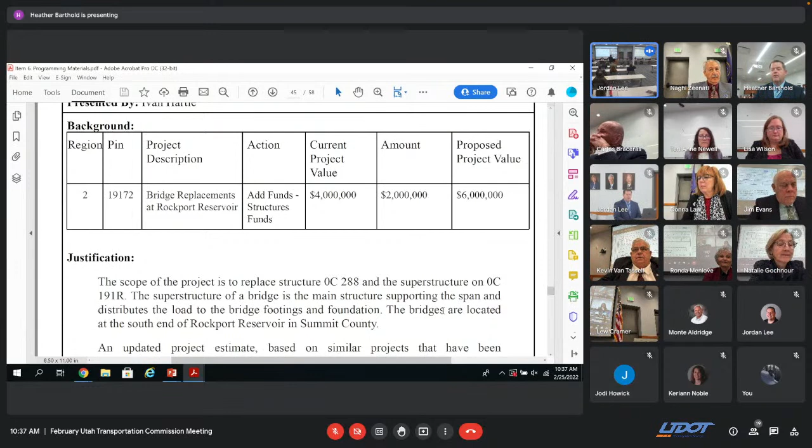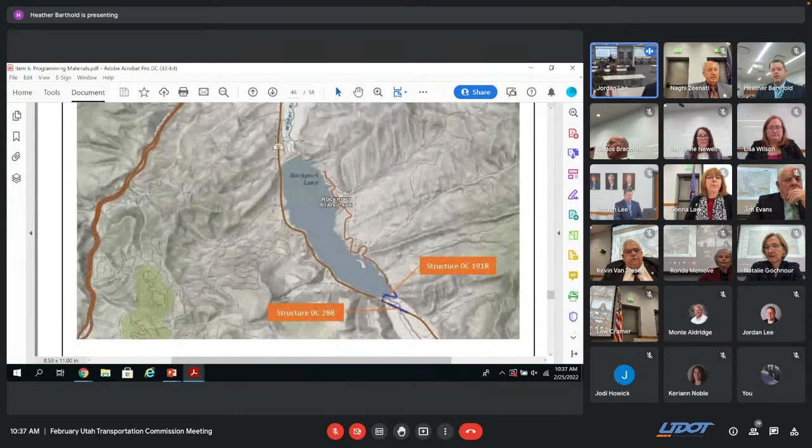An updated project estimate, based on similar projects completed or bid recently, shows the project needs additional funding, both in material and labor costs. Located here on the map at the south end of Rockport Reservoir. Today's request is a motion to approve adding funds to the bridge replacements at Rockport Reservoir project as detailed.

Mr. Chair, I'll make a motion. Okay, there are 2 bridges. There's 2, yeah.

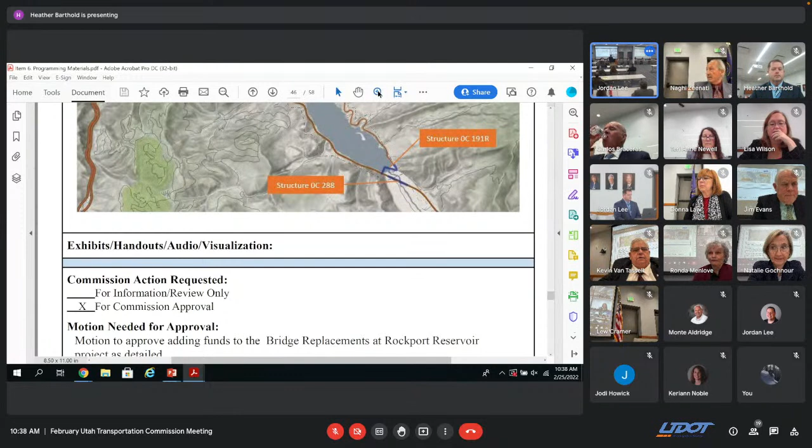I'd second that. Okay, there's a motion and a second. Any other questions? Seeing none, all in favor say aye. Aye. Any opposed? Item 6A-12.

6A-13, the Henrieville Bridge replacements have also a funding increase, currently funded at $11 million with a $4.5 million request. 19-476, the Henrieville Bridge replacements will replace structures 0C284 and 0C322. The bridges are located on SR12 near Henrieville in Garfield County. This project needs additional funding due to fluctuating material costs and labor shortage. The proposed increase is based on similar projects that have been completed or bid recently.

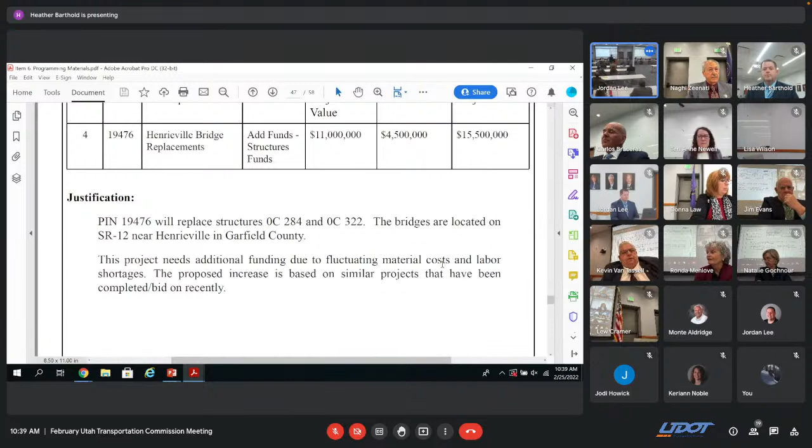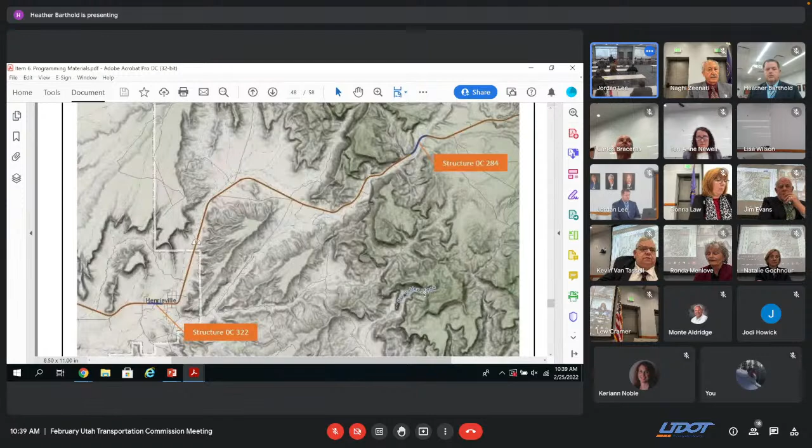Located here near Henrieville. Our request today is a motion to approve the Henrieville Bridge replacements funding addition as detailed.

Move for approval, and then I have a question. Go ahead, ask the question. I'll second.

With these increases in labor and materials, we're hoping to get this started in time to get it within this, not add again. I'm sure we all have the same question, and we keep doing it because we have to get them built. But is that part of the scoping when we say we're going to add this, we think it's going to get with the adjustments and get it done within? Is that part of when we analyze adding the additional amount that we come up with?

Many of our projects, especially our structures projects, are funded in future years where we have not yet fully committed the amount of funding that has been programmed to the structures programs or to the individual programs. So the funding would come out of those unprogrammed years. The estimates address potential costs in those years rather than just taking a look at what it costs today. If we're not going to bid it for 2 years, we add inflation or add to the estimate. So we're watching the trends, it's our best guesstimate, yeah.

Mr. Chairman, if I could, because there has been an unstated theme, or maybe we've stated it too much, cost increases over this. We were planning in March, our workshop, to have a presentation, and Carmen might not be aware of this yet, but we wanted to have a more robust conversation about where we're seeing costs, what we plan for, what we've seen, and what we're anticipating going forward. Typically, on a high level, we plan for about a 5% increase year over year as we build out this STIP, this 4 to 5 year transportation program. Last year we saw around 14%. So we're reacting right now, but as we react, we're also anticipating, and trying to better understand market conditions. Which is great for planning, so thank you. I was just wondering if that's kind of what we're looking at.

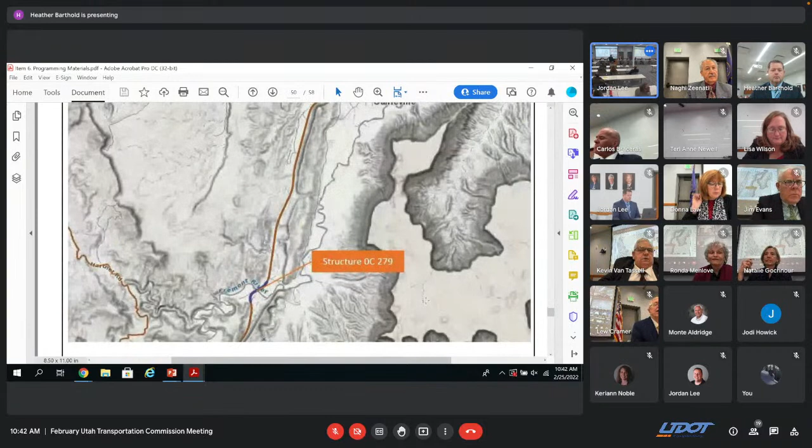Located here on our map. Our request today is a motion to approve the Fremont River Bridge replacement funding addition as detailed. I'll make the motion. I'll second. There's a motion and a second.

Any other questions? Comments? Seeing none, all in favor say aye. Aye. Any opposed? Item 6A-14 is approved.

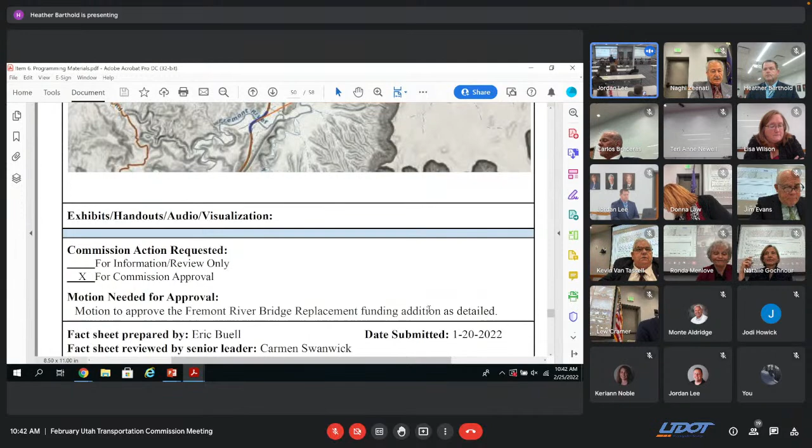There we go, 500 West, 3300 South to 3900 South. The scope of this local government project is to reconstruct the existing roadway, upgrade the drainage systems, install bike lanes, and rebuild the signal at 3300 South.

This project was initially approved and funded in 2015. Current estimates show that this project is underfunded. South Salt Lake City is requesting an additional $2.5 million to account for the increased material, labor, and construction costs. The city has also committed to cover the entire shortfall of $2.5 million. This TIP amendment was approved in the Wasatch Front Regional Council Trans Com meeting on February 17th of this year.

Located here on the map, along I-15 and 33rd and 39th south. Again, information only. Associated with this in the packet are the letters of commitment from South Salt Lake City.

Do we know why they waited 7 years to do this project, approved in 2015? A lot of times these WFRC or local government projects are approved 5 or 6 years in advance. This particular one was initially approved in 2015, so they're just finally getting to the point where the money that was programmed is now available to spend. That's why it's at this point.

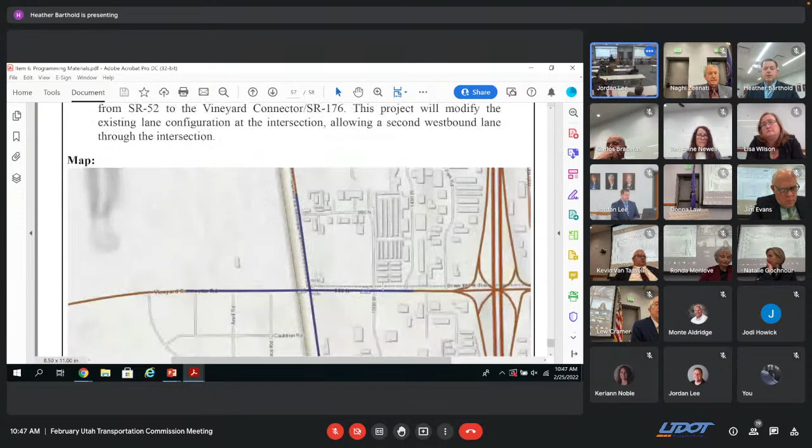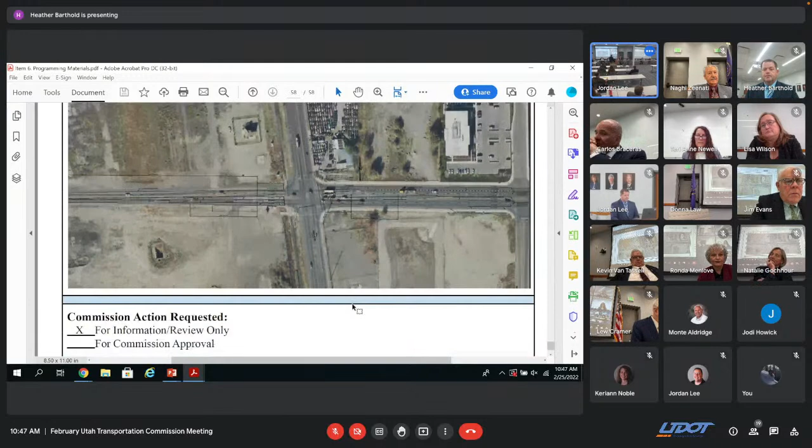And then some of the design work on what that will look like. Again, this is informational only. This project has been approved under the Deputy Director authority given in Utah Transportation Commission Policy 01-01, for Transportation Solutions projects under $250,000.

Okay then. Thank you. Thank you, Adam, good job. Okay, next item on the agenda is the State Infrastructure Bank, SIB, and Ryan McMullen will present that item. He's dressing like a banker these days too, I should say. He's the richest man in Babylon, she said.

Chairman, Commissioners, thank you very much for having us today. So today I have two requests related to the State Infrastructure Bank. The first is a traditional loan, and the second is a follow-up to one of our more complex, less conventional loans that you've already approved. We believe some changes have been made by the legislature that allow us to follow our conventional process in establishing the rate of loans you've already approved. As is our custom, the first thing we typically do is bring you up to speed, since it's been a couple months since we last talked about the financial condition of the State Infrastructure Bank.

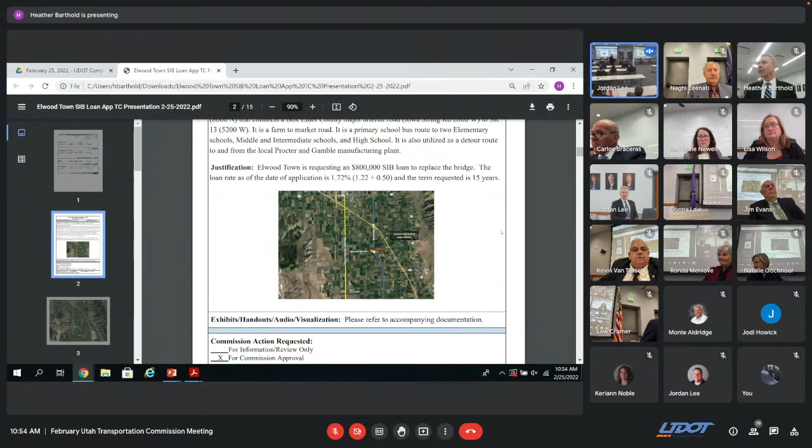As of the date of their application, the bond rate was 1.22%. The rule requires that we add 50 basis points, making the loan rate 1.72%. They've asked for a 15-year term.

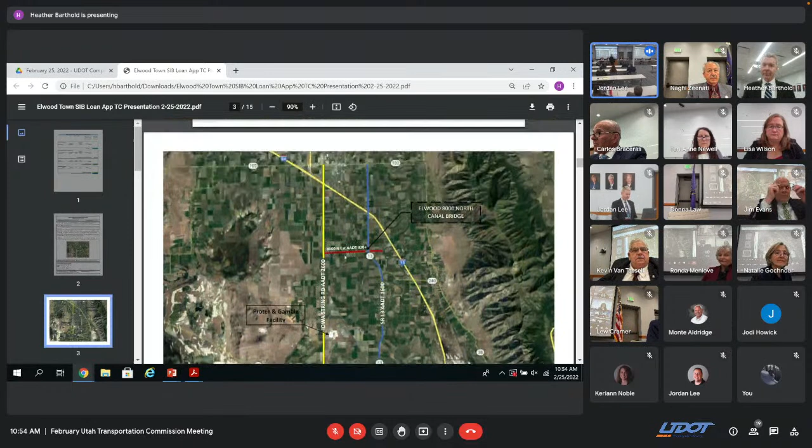Commissioner Cramer, there you go, there's the map. You know, I do. They're waiting for your visit. That's great, and the population I see is over 1,000 people. Sorry to be so ignorant.

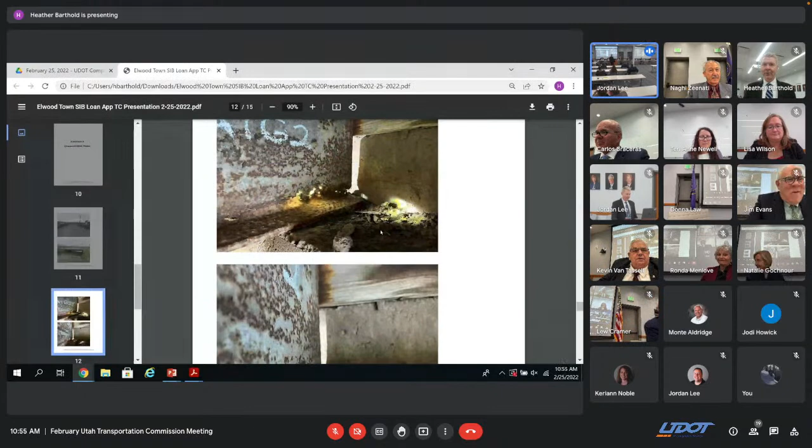Here's some pictures of the structure, like that guardrail there. Yeah, some of the bridge inspection pictures.

If approved, the amortization table shows it would be about $61,000 a year for the next 15 years for the town. We come to you today with a request for a motion to approve this loan so we can get that bridge back in service.

Mr. Chair, I'll make a motion to approve this request. Second. Motion and a second, thank you. Any other questions? Seeing none, all in favor of item number 7-A, say aye. Aye. Any opposed? 7-A is approved, thank you.

I can't say that very loud. Okay, the next one, we're gonna go in the Wayback Machine a tiny bit.

Last year, the Commission approved 3 SIB loans back on October 22nd, and the rate for the loans was a little different because the statute the legislature passed last year authorized UDOT to bond up to $30 million for these loans. The bond hadn't happened yet, so we asked you for permission to make the rate of the loans subject to the eventual rate we bonded for.